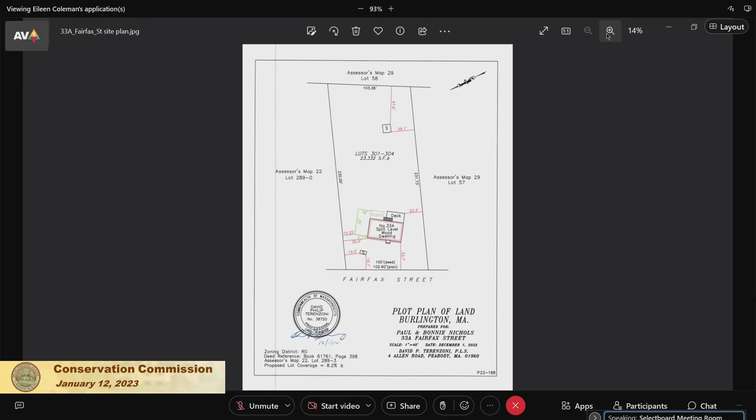Sure, yeah, so Paul Nichols, resident of Burlington at 33A Fairfax Street. The proposed project is a 16-foot by 32-foot family room addition on the left side of the house, if you're facing the house from the street. It is set back about a foot from the front edge of the house and extends 32 feet. So the 16 feet runs parallel to the street, and then the 32 feet goes back perpendicular to the street.

Where the proposed addition ends is, I believe, 152 feet from the stream, which is behind the property. Correct. Okay, thank you.

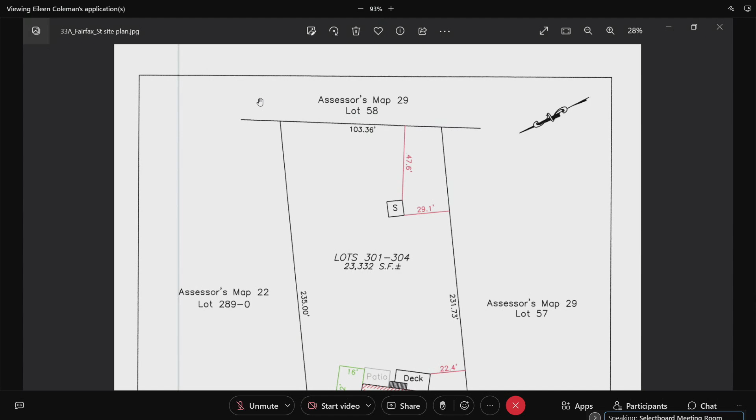Eileen or John, you got some comments for us? It's as Paul described, pretty simple. I'm sharing the site plan here. It's a fairly small addition he's proposing to put out to the side, but because there's a stream on the regulatory streams map along the back of the property, the stream is about 162 feet from the existing house. The addition will be about 10 feet closer than the existing house, up to approximately the level of the patio and deck he has there.

So this puts it into riverfront, hence the RDA. I'm not concerned about this as an issue. It's going on existing lawn only. As I recall, the property is fairly level right at the level of the house. There's a little bit of a drop, then it becomes very flat back towards the stream, and there's a fence between the backyard and the stream anyway.

Okay, let's go to the commission and see if anyone has comments. A few of us were out there for a site visit. Ed, any comments? No, nothing I can see — it's pretty clean looking what he's proposing. I definitely feel no problems. Kent? As Eileen said, it's within grass and pretty minor, so I don't have an issue.

All right, Don? I don't have any questions. Okay, again, this is one that's easy to approve. It's a good distance from the resource area, which is a regulated stream — more than 100 feet, so it's in the outer riparian zone, which is somewhat easier to approve work in.

Is anything happening to the shed at all? Is it going to stay where it is? Yeah, there were no plans to touch that — that might involve work in the inner riparian if something was done with it.

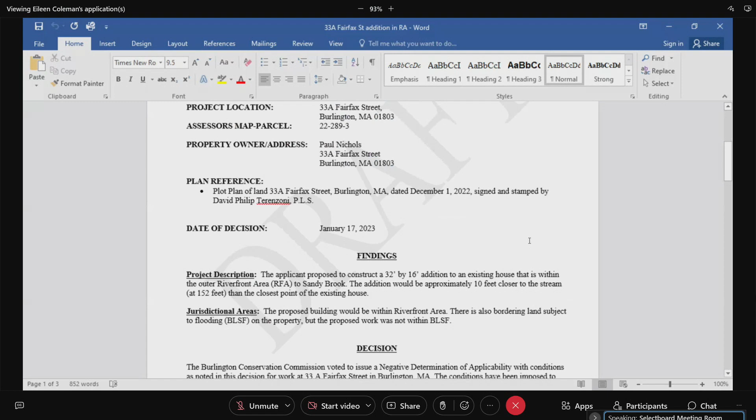So this just references your name and address, and the plan references the plot plan you provided. The applicant proposes to construct a 32 by 16 foot addition to an existing house within the outer riverfront area to Sandy Brook — sorry, I forgot to say it's Sandy Brook, not just an unnamed stream. The addition would be approximately 10 feet closer to the stream, at 152 feet, than the closest point of the existing house. The proposed building would be within the riverfront area. There's also bordering land subject to flooding on the property, but the proposed work is not within the BLSF.

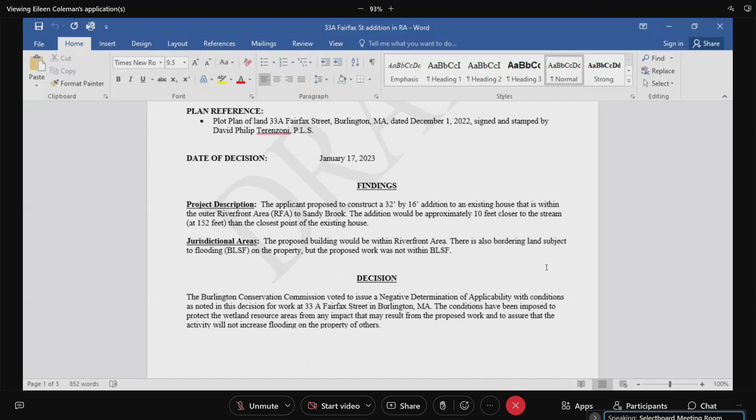Most of the decision states that this approval is only for the project as described here and tonight, followed by conditions that must be adhered to — meaning this covers only the work outlined in the project, and anything else would require coming back to us.

Before beginning, you should install sediment barriers approximately 30 feet behind the existing house — these could be staked straw wattles, filter socks, or hay bales, in a line straight across, and they'd remain in place while work is being done and until the disturbed area is revegetated. All construction or demolition materials and excavated soils shall be disposed of off-site.

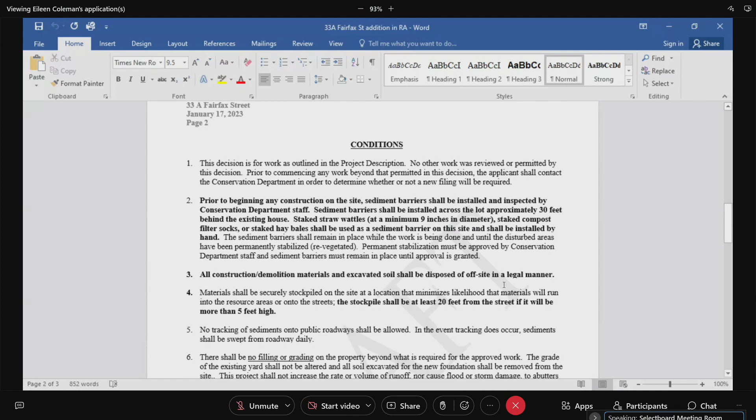Materials shall be securely stockpiled in a site that minimizes the likelihood that materials will run onto the resource areas or onto the streets, and stockpiles should be at least 20 feet from the street if more than 5 feet high. No tracking of sediment onto public roadways shall be allowed, and roadways shall be swept if concrete trucks track sediment out. No filling or grading on the property beyond what is required for the approved work, and we're not expecting any significant grading for this at all.

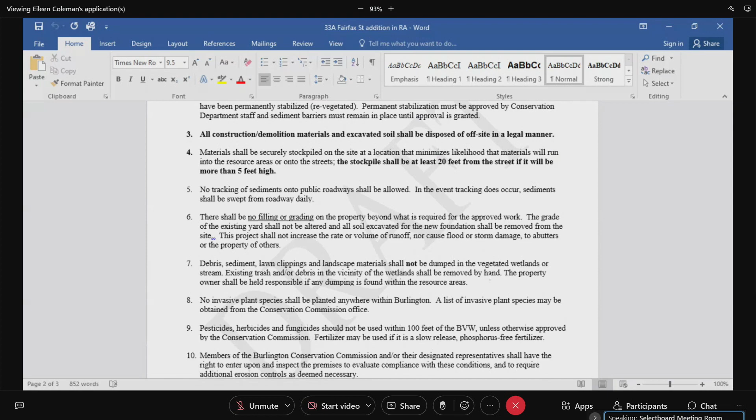That's right. Don't dump anything into the stream or the vegetated wetlands, which is way down the back end of your yard. Please don't plant any invasive species, or use pesticides, herbicides or fungicides within 100 feet of a wetland or within the riverfront area. And it's just allowing us the discretion to go on site to check that you're adhering to these conditions.

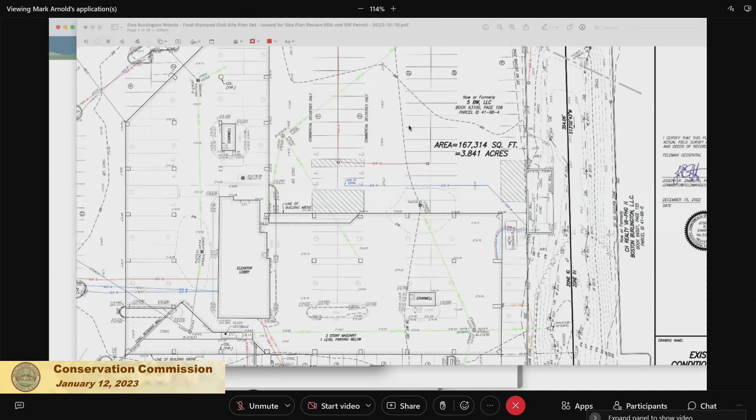Yes, yes. So this is the existing conditions plan at 5 Burlington Woods. This is Burlington Mall Road here, and this is Burlington Woods Road at the bottom of the page. The existing building is an L-shaped building here.

Most of the building is on piers, so there's actually parking underneath it. So when you see the plan here, and I'll zoom in on the building itself, you can see there's parking underneath the building because it's raised on piers, allowing for parking underneath the structure. The center core of the building does touch the actual ground, where the elevator shaft is and the lobby is. And there's a section of the building up here that is at grade at the drive.

The wetland resource area on the property is an isolated vegetated wetland. In this area right here, it has several stormwater pipes, one from the adjacent property that goes into it up here, and the site has a discharge right here into here. The site has deep sump catch basins that collect into a number of drainage pipes, and they all discharge at this point right here.

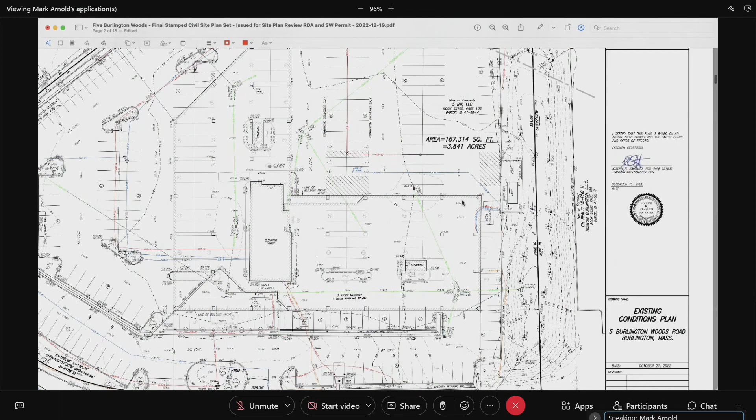There is an existing HVAC unit, concrete pad, and several large masonry walls in this area. That's the closest development area to the wetlands right now. The rest is just parking lot along the edge here, with the building in this area. Your 100-foot buffer zone is right here, this dashed line, coming in to here. So a portion of the building is in it, and a portion of the parking lot is in it.

But most of the property is outside the buffer zone itself. Those are the existing conditions on the property. So the proposed activities are—let me get to the right sheet here. So again, here's your buffer zone right here to the wetlands itself. This is your 20-foot no-disturb area.

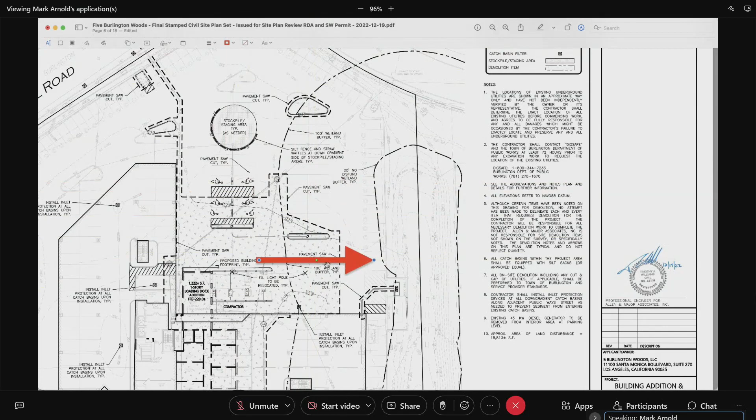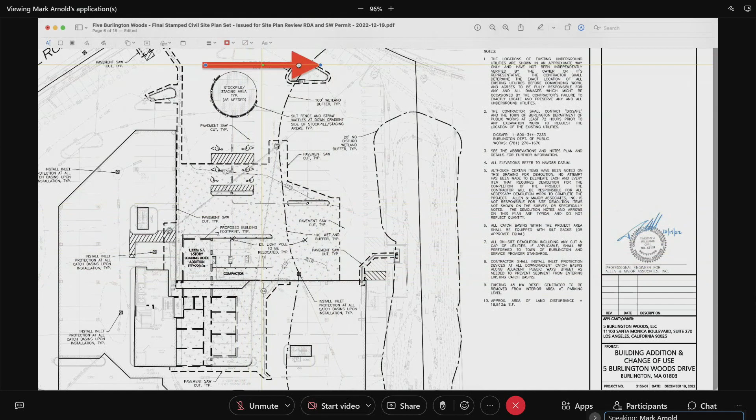So regarding impervious surface or activities in this area, we're working within an existing concrete pad area. We're just putting a wall up over a short wall—no new wall, no new footings, no new digging happening. It's just a masonry wall built on top of an existing short wall. Then you have a utility line trenched in from the building over to the generator. The rest of the work in the buffer zone is just this pavement work here, reconfiguring some landscape islands with light poles and some additional utility work over here.

The reason this utility line goes like this into the buffer zone is because this is actually a slope—you drive down this slope to get underneath the building. So to allow this utility line to be trenched up through here rather than going through this retaining wall at a really high depth and elevation, they're running it through the existing parking lot area instead. So those are the areas within the buffer zone.

Outside the buffer zone, we have a few things happening. We have a reconfiguration of some pavement here to construct a loading dock. That loading dock is just to allow the building to have additional commercial uses beyond existing conditions, to allow trucks to be able to back in here. Because it's a loading dock, there will be a lower section of pavement placed here instead of a higher point.

Because of that, they're installing a trench drain that will go through an oil water separator here, tying into the existing drain line. That's basically just to provide treatment and extra treatment for that area, since it's going to be an area where trucks are parked versus just cars. So the goal is to provide a high level of treatment before it goes in there.

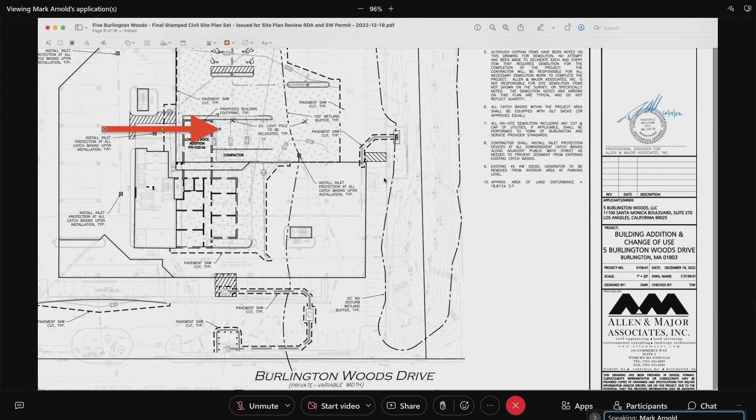Again, there's a decrease in net impervious surfaces in the buffer zone because they're reconfiguring the landscape islands, actually making them bigger and replanting them with shrubs. There's another additional area up here—we're doing some additional sidewalk here. This is part of the planning board request. There's no good sidewalk access from Burlington Mall Road over to Burlington Woods Drive.

So we're adding some sidewalk in here and a crosswalk with a sidewalk there. That creates uniformity for walking from Burlington Mall Road all the way over to Burlington Woods Drive, which is going to be a really good, significant benefit to the public and provide really good pedestrian safety. That's the project in a nutshell.

The stockpiling is going to be outside the buffer zone. We have erosion controls shown—all catch basins will have silt sacks to prevent discharge. But regarding real earthwork, there's really no raising of grades. There's going to be some excavation and removal of soil, and that's about it. So we don't have really new grade areas or slopes, or areas that are really going to be seeded. Most of the work is trenching in existing asphalt, and then it will be repaved.

That's my presentation. If there's any other questions, I'd be glad to take them.

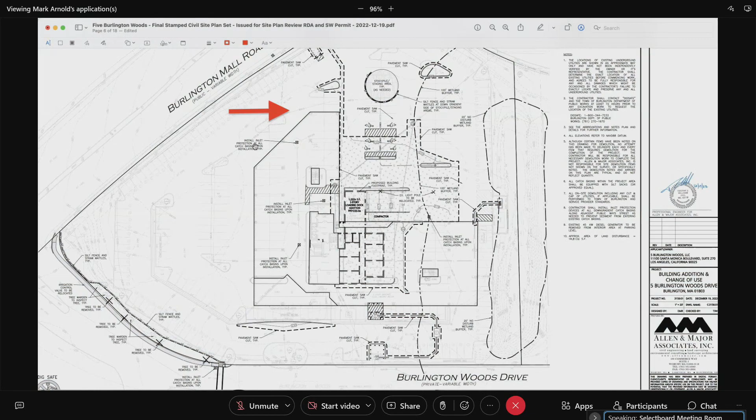So I have a couple of questions probably related more to the stormwater bylaw. Can you tell me, the isolated wetland appears to be a man-made wetland. Is there an outlet for that, or does all the stormwater for this entire site go to that wetland? And is that the end point, or is there a discharge from that?

From an existing condition standpoint, I'll bring you back to the existing conditions sheet. All the drain lines from the property do drain to this area. It's an area that definitely sees flooding. When we delineated it, it showed evidence of ponding. It was dry at the time we delineated it, but it definitely holds water. There's a pipe that comes out here that goes to Burlington Woods Drive. I'm not exactly sure where that goes.

From our understanding, there was a previous filing with the adjacent property stating this was isolated. So we went out and delineated it. We had flags very similar to what they flagged, which went all the way up into this grass swale here, connecting to the pipe here. So from our understanding of the review, it's an isolated vegetated wetland, and all the stormwater does go just to this wetland here and eventually recharges.

Okay, so the reason I'm asking is if there's no outlet to that wetland, I'd probably be less concerned about the water quality structures up gradient, since if it doesn't discharge to our municipal storm system or to any wetlands, if that's the end point of all the stormwater.

If not, if there is an outlet and it connects to the MS4 on Burlington Woods Drive, then as part of the stormwater review we'll probably want some sort of inspection of the existing catch basins to see what the sump depths are and what their condition is. Do you know if they're planning on reconstructing the parking lot at all?

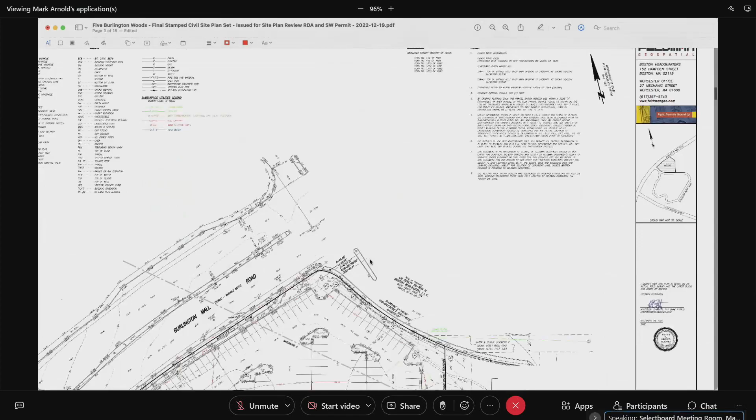So basically, yes. In areas where work is occurring, they're repaving and patching the asphalt. But I don't think the intention is to repave the entire property, just the areas where work is occurring. In regards to the stormwater, again, to the best of my knowledge, the area is isolated.

They are coming in to meet with the development coordination team and the various departments in a couple of weeks, so we can certainly ask the civil engineer. And the project is before planning board as well, so there will be some additional review from that board. Most of my concerns are related to that, and we'll have another bite of the apple on that.

I don't really have any concerns about the request for determination of applicability. Let me go to the commissioners now and see if they have any comments.

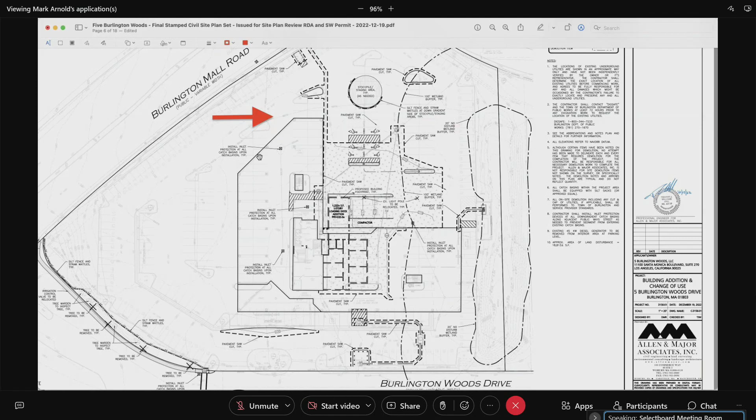Now, the outlets themselves from that upper parking lot, did you say there's one or two pipes coming out of that? There's one pipe in the upper area, so I'll bring it back to the existing conditions plan. There's one inlet up here that comes in right here. This area is actually almost a grass swale, and then right here is where you actually get some woods.

So our delineation comes all the way up through this grass swale. We actually looked at it a little carefully just because we weren't sure if the swale was hydrologically part of it, but with the pipe coming in here, we delineated the whole swale that drains down to the lower part of the wetland, which is down here.

Okay, that's all I got. Don, any comments? No, I don't have anything. Kent? John covered the one question I had. Robin? No questions.

Okay, I'm finding it kind of hard to follow the drainage of the whole parking lot. How many catch basins are there on this lot?

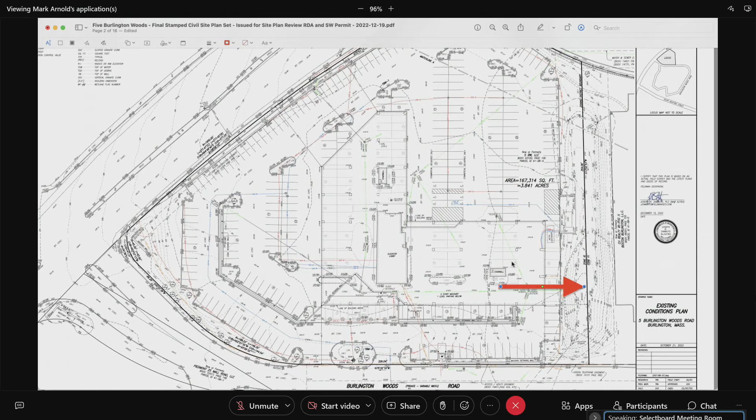So there's a catch basin here. Yep, there's a catch basin here. There's a catch basin here that drains to this manhole right here. You've got a catch basin here, which drains to this catch basin here, which goes to this catch basin here, which goes to this drain line here. And all these connect and go right down here to one outlet.

So you have a system basically draining here to here. This side of the site goes to here, and then this end here goes to there. Okay, and what is that last junction point? Is that a catch basin also, or just a manhole before it? It's a drain manhole, not a catch basin.

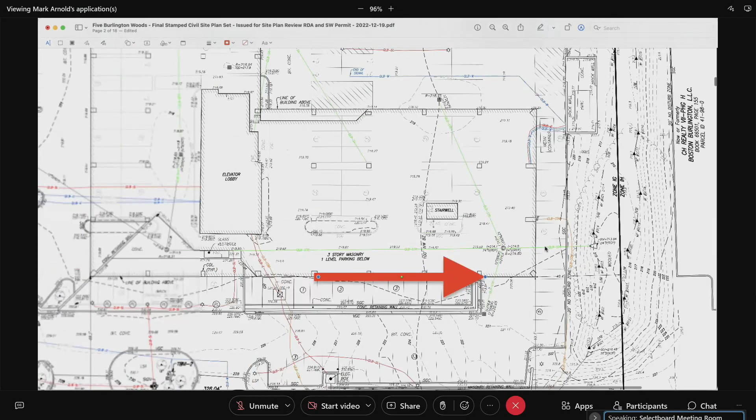All right, so if we did end up with concerns about water quality, that could be a location to put in a water quality unit if everything ties in through there. So we'll have to wait on that decision, depending upon what the rest of the hearings decide.

Questions I had were answered. I'm noticing what's marked as the resource area - half of it is mowed and half of it is not. If we're gonna call it a resource area, should we prohibit mowing in any of it? Or does that make a difference?

Is it important? Well, from a question of use, this area was probably an old wetland that was regraded into a stormwater basin. So it is functioning like a stormwater basin. This area basically has a grass slope here from this parking lot, which is the hotel, comes down and you have a grass slope up here. So it's kind of part of the landscape network in this area.

And it looks like there's a pretty well-defined edge right here where you end up with large shrubs and trees. So it definitely looks like they haven't been encroaching in there. There hasn't been any landscape dumping or anything in that area either. So I think from a standpoint of maintaining existing conditions, the applicant would like to just maintain that because it blends in with the rest of the property.

I don't think it really impacts the function. This area of the wetland is a lot higher - it's really a drainage swale basically, but it is kind of part of the wetland in regards to functionality. You can see the topo starts right here, it drops down a foot, and then down in here it drops down another foot. So you're a lot higher up here than down here. I don't think there's a lot of ponding that happens in this area at all. It receives some water, may flood very short in large storms, and then drains to the lower spot.

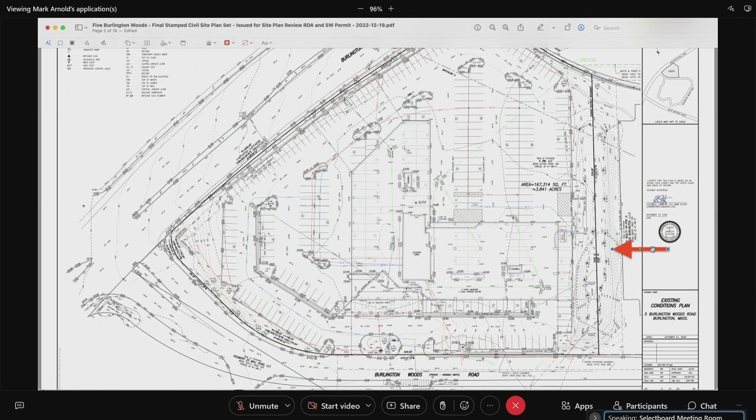Okay, I think that's all I have for questions. Do you feel we can close this application tonight? Sure. Okay, then let's go over the document.

Okay. So there's a lot of plan references to the findings. Did you hit share? Oh, sorry, you're waiting for me to share. Yeah, I'm just going to read it. Oh, I'm sorry, I can't multitask, sorry.

So the project description includes a lot of the site work that's not actually within the buffer zone. So really the work in the buffer zone is the landscape islands and the work around the generator and the wall near the generator. Work is in the 100-foot buffer zone to vegetated wetlands under the Burlington bylaw, so it's not a state-regulated wetland. Closest work is about 10 feet from the wetland.

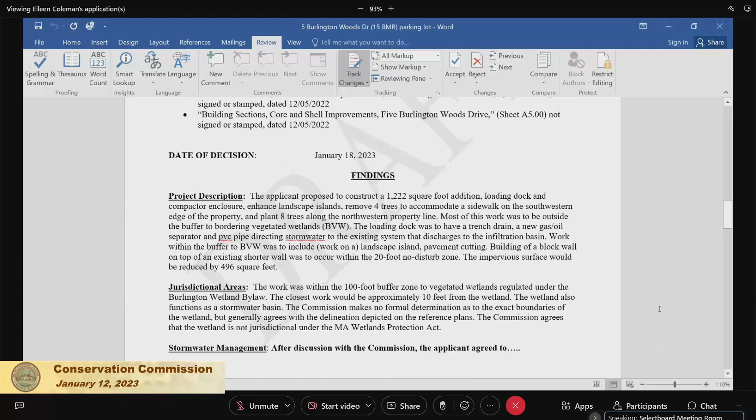The commission's not actually agreeing to the formal boundaries because of the time of year where we didn't go out and check soils, but we generally agree that the delineation looks good.

We never finished the stormwater management section on this. We should just delete that because we'll do that under a stormwater bylaw. So we can just skip that section, wondering whether our discussion would lead to something.

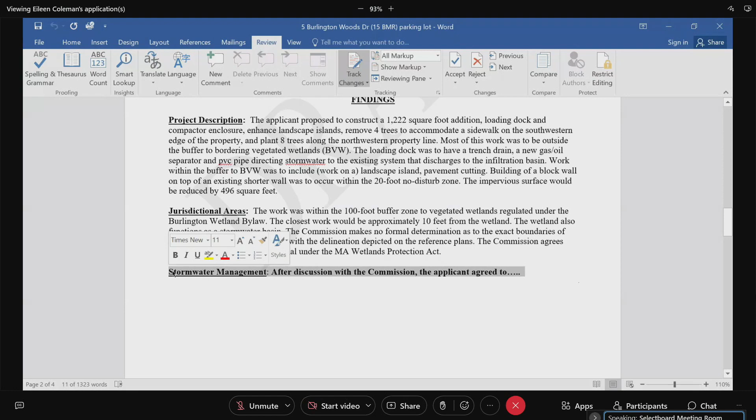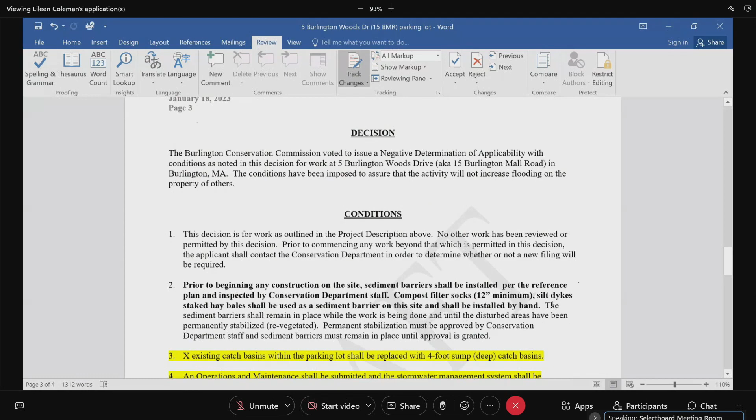Condition 1 is for the project as described, no other work is approved. Condition 2 is regarding the installation of erosion controls prior to construction, a standard condition. Conditions 3 and 4, we'll just delete the first 3 and 4. Yeah, and then there's another 4 after it, we won't delete the second 4.

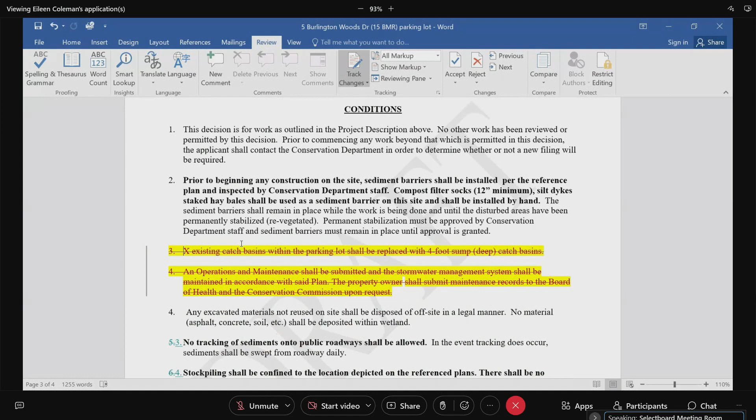Excavated materials should be disposed of in a legal manner, no tracking of sediments, stockpiling as shown on the reference plans, no filling or grading under this decision, no dewatering unless we've reviewed and approved the dewatering plan in advance. Number 9 is a standard condition about the commission's right of access to do inspections, and condition 10 is about what happens if there's non-compliance.

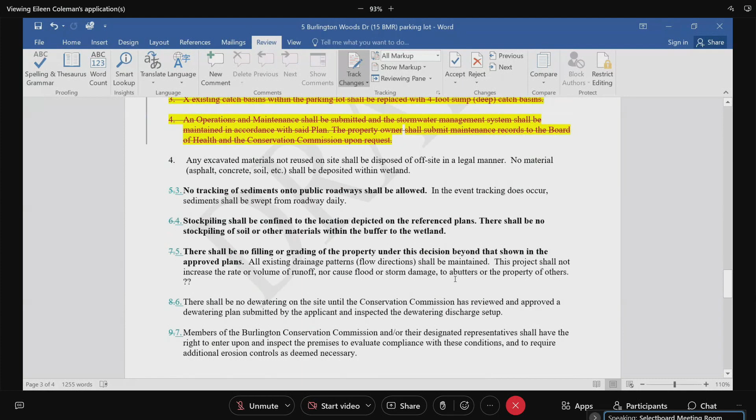Do we want to add something, as Bill said, about hand removal of debris in the area? Sure, yes, a condition of trash removal in the area, yep.

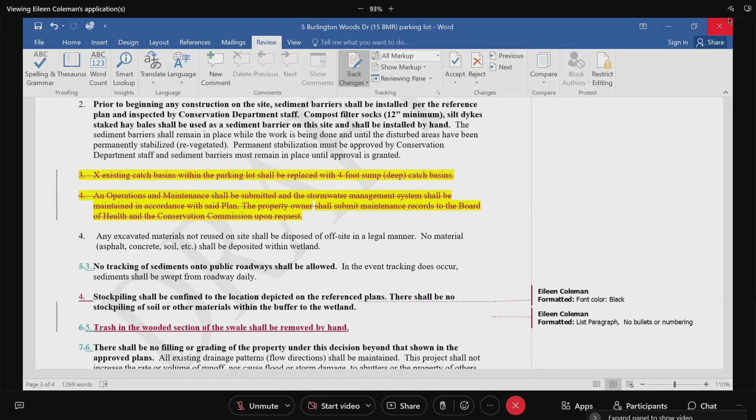Okay, very good. So in that case, do you have any other questions regarding the document, sir? No, thank you so much.

Then let's go to a vote. I need a motion to approve, to issue a negative determination of applicability for 5 Burlington Woods Drive. So moved, Don. Second. All right, let's go to the vote. Ed, how do you vote? Yes. Don? Yes. Kent? Yes. Rob? Yes. And the chair votes yes, so by a vote of 5-0-0, the motion is approved.

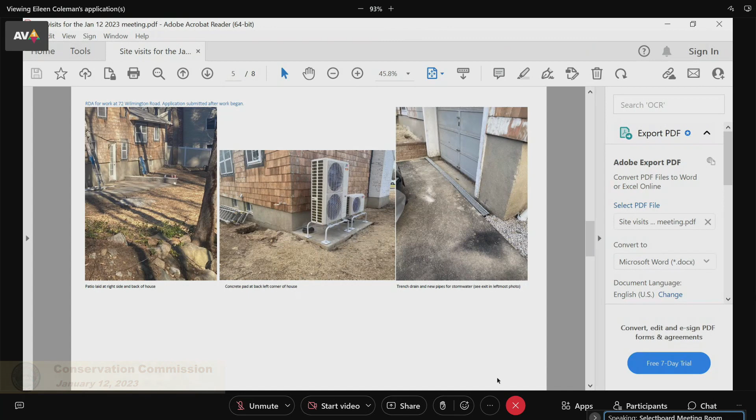So as Mr. Rumley described, he has not touched the footprint of the house. The house is as is. It is very close to a stream. It's actually part of the Ipswich River.

I think somebody noticed that landscaping was occurring, and we tried to make contact with Mr. Rumley, who came in and visited us and explained that, as he said, he was going to be redoing some walkways that were already there, and he wouldn't do any other work. We've had a little bit of trouble just with communication, trying to get an RDA in.

So we have been out to the site. I was really only on the site properly with everybody else a few days ago, but I have taken a lot of pictures from off the site. So as he said, back over here, some of my pictures are old and some of them are newer.

This is where he had, I guess, replaced a pathway that went around the side of the house. It was done with pavement, so it looks like a patio there. I think the little wall might be new, but I'm not really sure about that. And then he's put this little concrete pad for the heating element or whatever that is at the side of the house.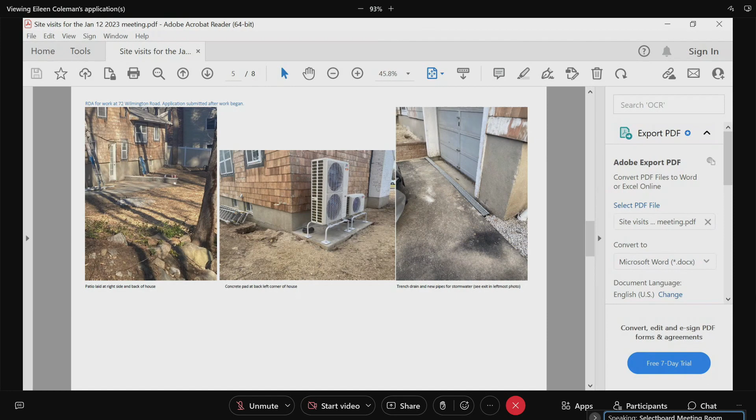He was explaining to me, but maybe he can explain a little better, about how this trench drain works. There were some pipes going down the side of the house that were pretty rusted, and he replaced those with PVC. There's a pipe that exits over here on the far left, I have a little trouble with left and right.

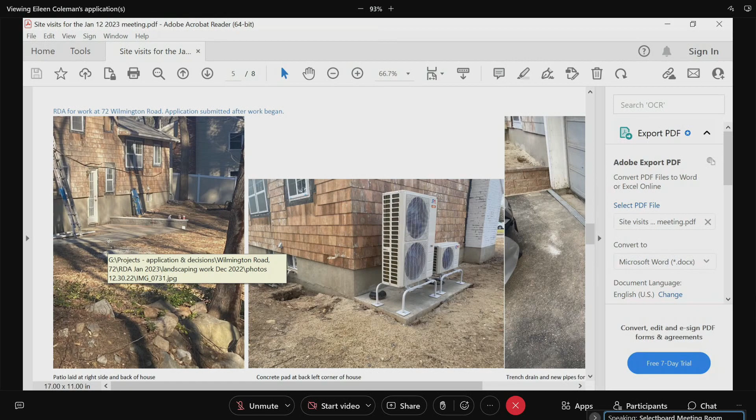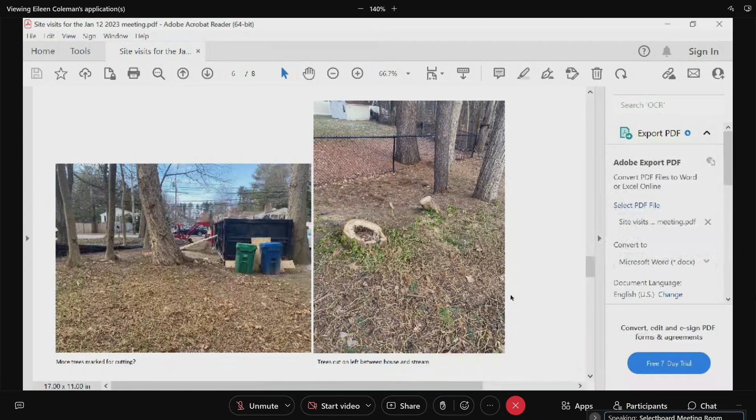But apart from that, his landscaping cleanup seems to have been a bit severe. There are definitely some places where it looks like trees were taken down. Now, this one was definitely damaged, but there are other places where trees or branches have been taken off. Pruning is fine in the riverfront, but he's taken down a lot of bushes like rhododendron.

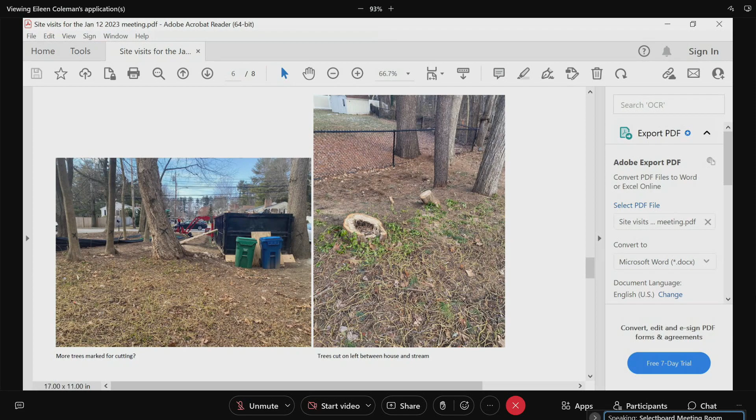And I do have a question, these trees here towards the front are marked. The left-hand photograph, there are trees marked towards the front of the house. Were you proposing to take those down? I got a price from Easton Tree Removal, and it wasn't close to being in my budget. Just as well, it wasn't even close to my budget.

So he put this, I think this is a temporary bridge, just in order to access over and back. As he explained, he did take some planks and various rubbish out of the stream, so that's good. But my concern is the fact that his cleanup was pretty severe.

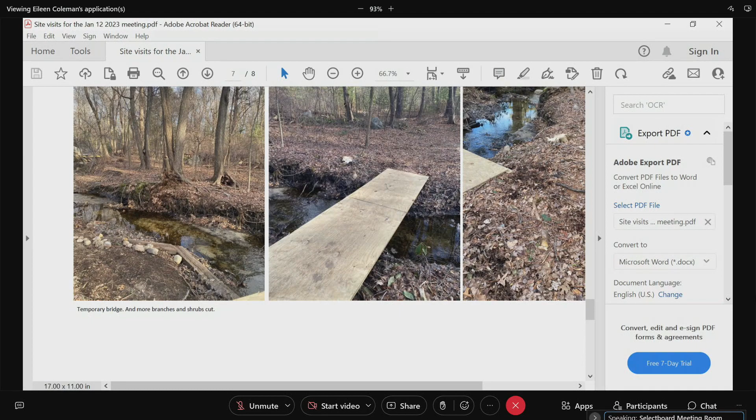He definitely took down quite a few bushes. This is the other side of the stream. It looks like they've dumped a lot of branches and the rhododendron shrubs back in there, and there's a lot of wood chips from their pruning work. There's definitely quite a lot of saplings and smaller trees that seem to have been taken down with their pruning.

The one on the left, that picture, when was that picture taken? Yesterday? This one? Yeah. Okay.

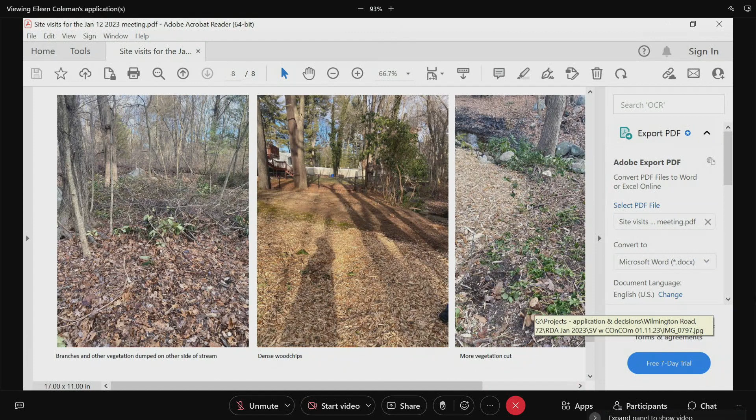That'll be cleaned up. I thought we wood chipped all of that when we had that chipper there. We pulled everything out of the back. That'll be thrown away in the dumpster.

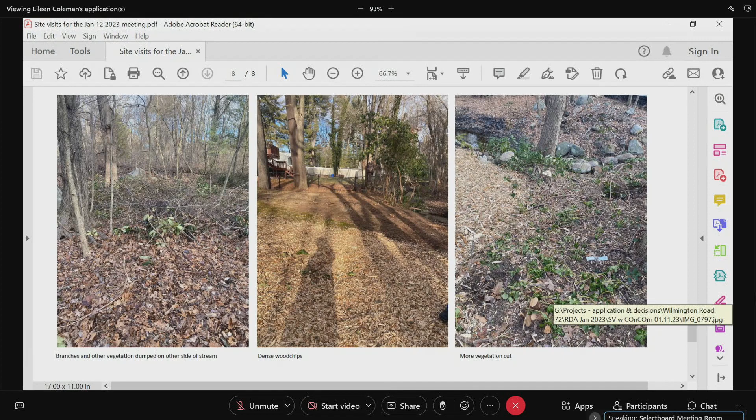I guess, is that river within the property lines? So it's on your property itself? Yes, it is. Oh, okay. I mean, looking at the river, it looks like it might be of interest, it looks like there might be a little bit of erosion possibly from the water, towards the slope of the bank seems to be a little bit curved, so I don't know if it's

I didn't visit the site, but if the stream is constantly flowing, it might be of interest to have some vegetation in the area to help stabilize the bank. Exactly, yes, very good point.

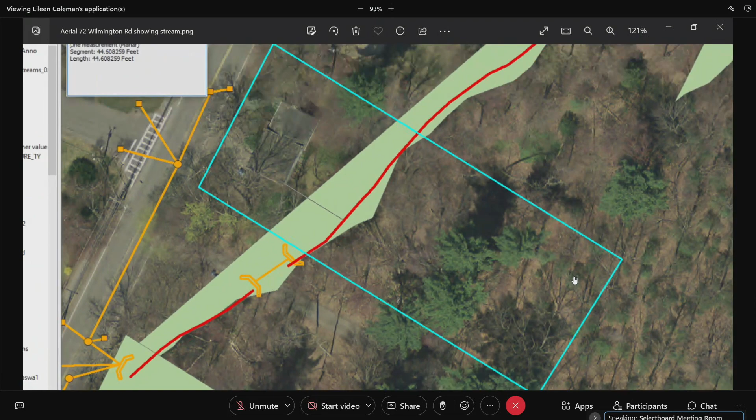So the previous owners, a long time ago, had actually armored the bank with timbers, and Mr. Rumley actually removed some of those timbers. They were all rotting and falling into the stream. So the stability of the bank, it's probably going to take a while to restabilize because of that stuff he pulled out of there. But it was a good thing that he did.

Yeah, okay. Bill, sorry to interrupt, I know it wasn't super clear to Rob that this stream is actually only 44 feet behind the existing house. So it's really pretty close.

Yeah, or at least it could also be of interest for the foundation integrity, or water into the unit too, if that's a concern. Yeah, whatever you guys suggest, I'll plant it there. I'm 100% for that. Yeah, I think we would want some planting along the bank. Yes, on both sides, if that's possible.

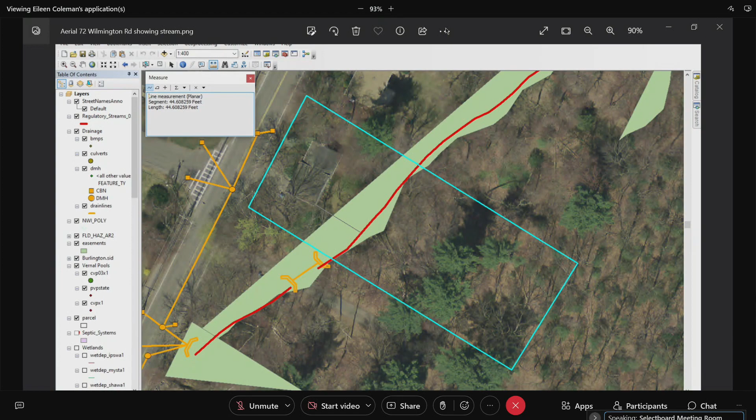Kent? Just based on your comments, Eileen, are you proposing some type of replanting in that area? And to John's point, if there was prior some type of stability that's eroded, is there something you would want done?

Well, as we explained earlier, partly for Rob's benefit, everything within 200 feet of certain streams in town is a protected area. It's a resource area that serves a lot of functions, so yes, I think it's important to stabilize and keep such areas well vegetated. I would think it prudent to replant several feet, certainly on the house side of the property, to improve the habitat, improve the stability, and provide some new native cover.

So yes, is there something you guys would propose, like native trees and shrubs, a certain number that you would want to put in the plan? That's maybe to be discussed.

Okay, Don? I concur. I think the area needs to be stabilized and mitigated with replanting.

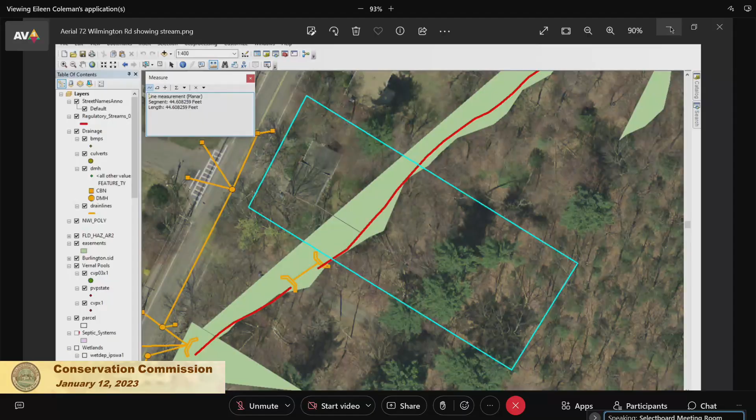All right, Ed? This is there for me also, but I would bring to your attention that along the banks of the river, there's a lot of roots actually coming right out of the banks, going nowhere. That's a loss to whatever trees those roots belong to. So now you've got to create something that's gonna stabilize that area based on what you're hearing. I saw plenty of roots sticking out the side of the banks caused by erosion and other methods.

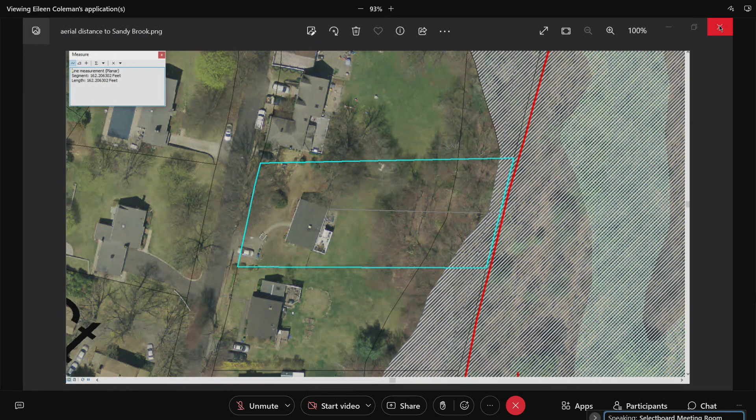The bridge itself that you have there, when does that temporary responsibility go away? I put that up the first weekend I purchased the house so I could get back there, because I didn't want to walk on the neighbor's property to clean up the debris. It's screwed down, two 4x12s. It can come up at any time and be hauled away. I did it myself, I can pull it up and out within minutes.

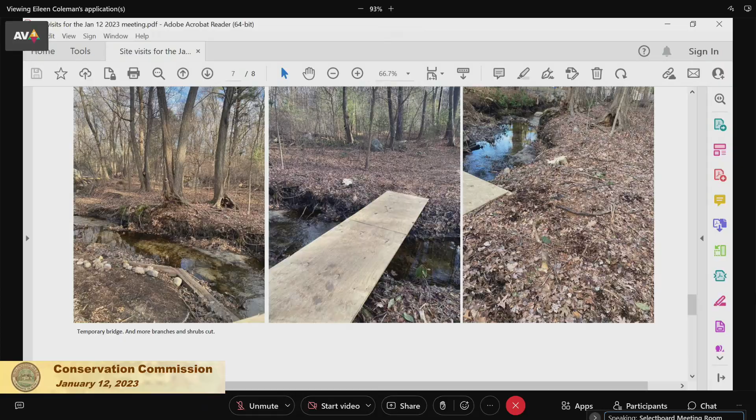Looking at the need as to why it's still there, if you needed any particular reason? Well, as of today, I'm gonna need it to get back there to get some more of that debris out, after this meeting, tomorrow, or whatnot. Or even access to the far bank for planting? Yeah, once that's done, you do intend to take it out? Absolutely, it's just temporary.

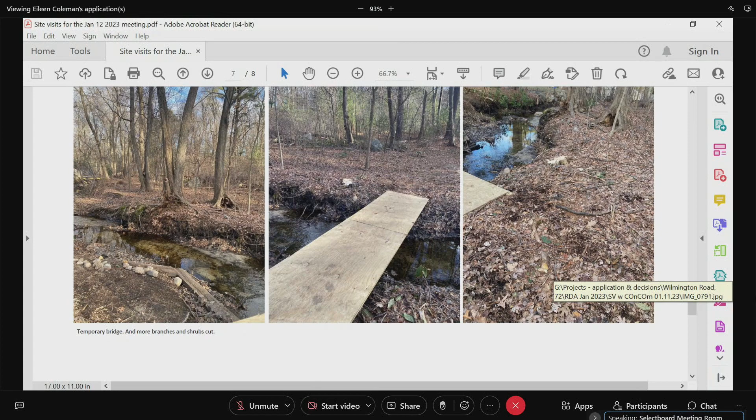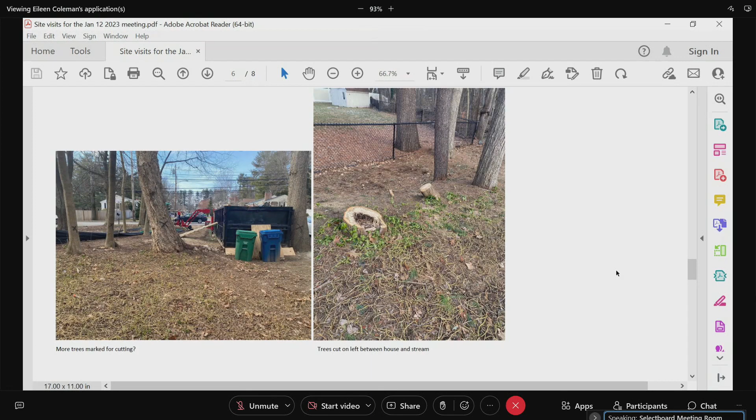Okay, I think all of my questions were answered by the group here. Seems like there was a lot of cutting of stuff, obviously just been cleared. And as was pointed out, rivers are protected, especially regulated streams. This is a particularly sensitive resource area because it's part of the Ipswich River, which has extra protection in Massachusetts regulations specifically. So regardless of its size, or even if it's not always running, if it's named as part of the Ipswich River, it gets protection as a regulated stream. The river banks are part of that system that must be protected.

This is so close to the house, we obviously can't say you gotta leave 100 feet, you don't have 100 feet by any means. So we need to define an area along the edge of the bank that should be planted and left natural. I would suggest something like 10 foot. Does that sound reasonable? We can't really even do 20 foot no-disturb here, so close to the house.

What do you think, 10? Yeah. So if we could get that planted, would you say that should be both sides of the stream? I was gonna say if you just leave the other side untouched, it'll come in. What do you think? Yeah, I agree. I think on the house side, plant some things to help restore it. Okay, you have something else to add? That's fine, I agree with that.

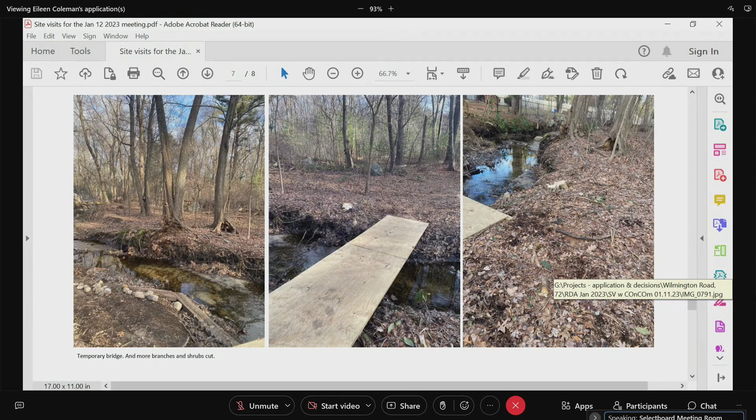But if you did want to put a more permanent bridge across there to allow access, that would be a more significant change to the resource area and would require probably a full notice of intent before us to do something like that. Doesn't mean it can't be done. And again, you can't do anything major on the other side, but if you like nature, it's a beautiful spot, it really is.

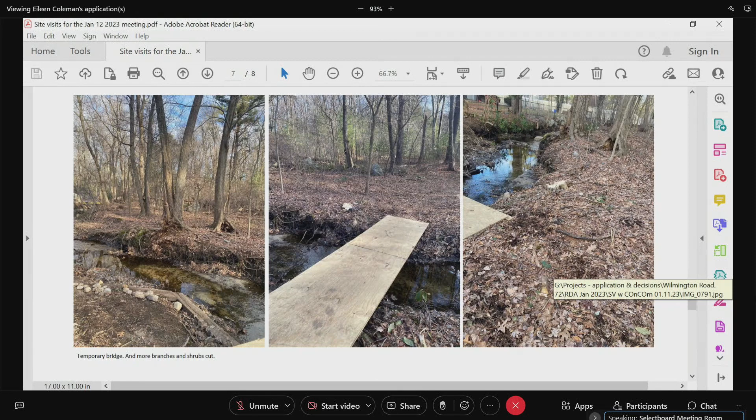So, okay, any other concerns? Do you want to go through the findings here? Sure. Do I have it ready? I sent Mr. - you got that, right? Yes, thank you. I sent him a copy earlier, so if he has questions, he will ask them after I go through it.

It starts off with his name and address, and the only plan we had was a sketch provided by applicant. He proposed to construct a patio, low retaining wall behind the existing house, trim trees and remove volunteer saplings, replace a degraded pipe conveying stormwater from the driveway and garage behind the house, replace concrete walkway in front and right side of existing building, clear debris and branches from the stream.

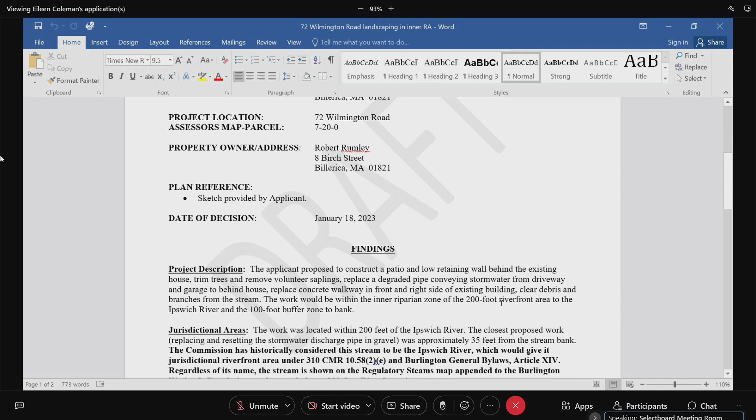The work would be within the inner riparian zone of the 200-foot riverfront area to the Ipswich River and the 100-foot buffer zone to bank. The work was located within 200 feet of Ipswich River, and the closest work, which was replacing and resetting the stormwater discharge pipe, that was sort of the physical work. I didn't really count the trimming, because that went right up to the bank. The closest structural work was approximately 35 feet from the stream bank.

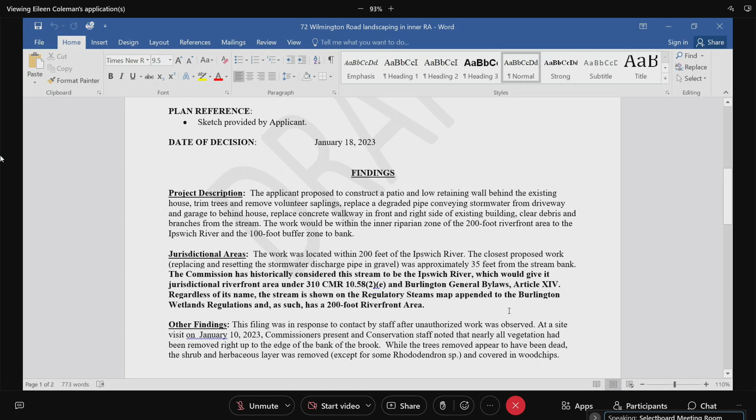This just goes on to explain how the Commission has historically considered this stream to be the Ipswich River. And even if it isn't, it's on the regulatory streams map, and as such still has a 200-foot riverfront area. This filing was in response to contact by staff after unauthorized work was observed.

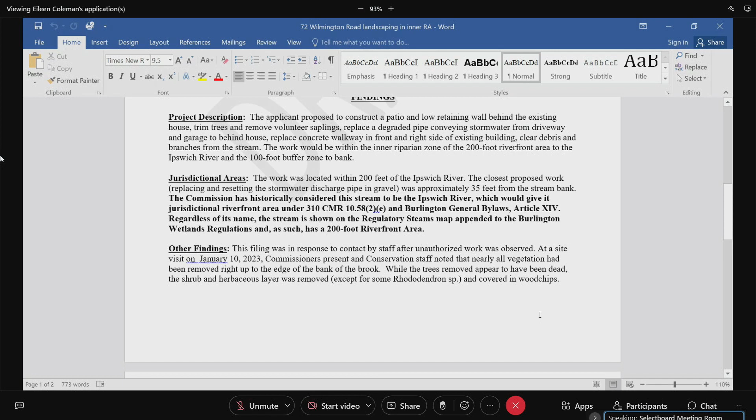At a site visit, commissioners present and conservation staff noted that a lot of vegetation had been removed right up to the edge of the bank. While the trees removed appear to have been dead, the shrub and herbaceous layer was removed except for some rhododendron species, and the area was covered in wood chips.

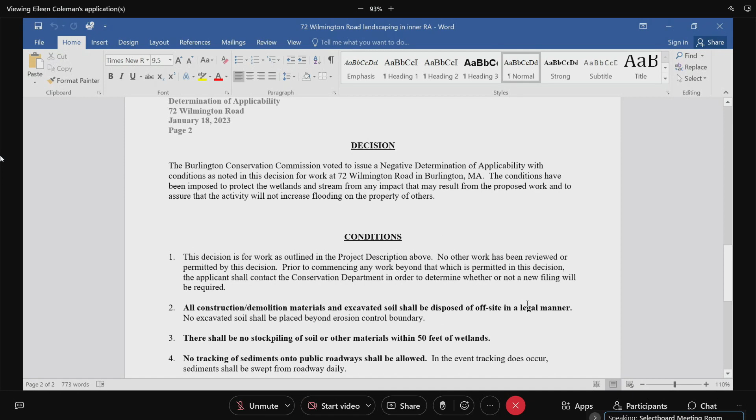Nonetheless, the Commission is voting to issue a negative determination of applicability, and the decision for work only as outlined above, as we described.

Any construction or demolition debris, the material and excavated soil should be disposed of off-site in a legal manner. No stockpiling of soil or other materials within 50 feet of wetlands or stream bank. No tracking of sediments onto public roadways shall be allowed.

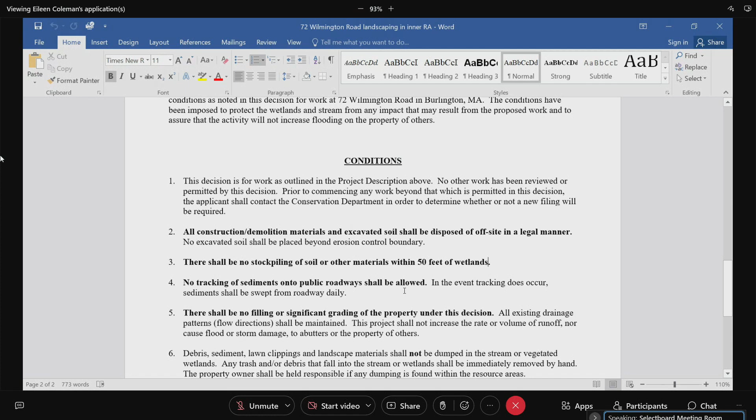These are all pretty standard, and most of the work is actually done in this case. There should be no filling or significant grading of the property under this decision. I don't think any grading did occur.

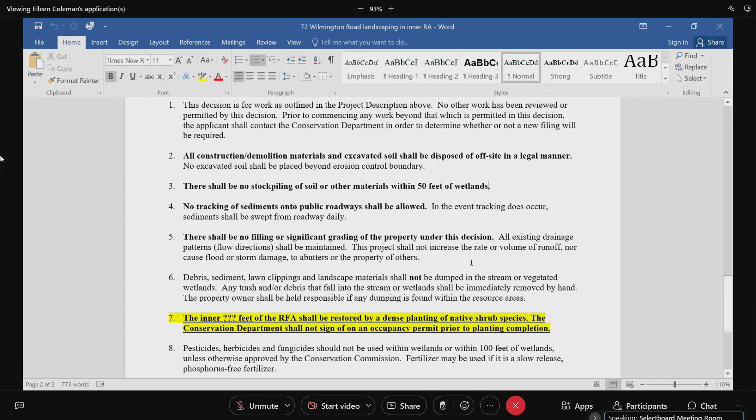Trash and sediment shall not be dumped in the stream or vegetated wetlands. So I think he's also going to remove - if you wish, I can put that in as a clarification - at some point after this meeting he will also remove the bridge. Well, I didn't mean the bridge. That's a good point - bridge and debris behind, the branches and stuff, yeah, to be removed, make it look a little nicer. He still has the option of putting a permanent bridge in if he wants. Well, he'd have to reapply - if he does so, he will have to come back again.

Yeah, and then so we had a discussion here about the inner - whatever feet. We had proposed something, and I think we agreed that the inner 10 feet of the riverfront shall be restored by a dense planting of native shrub species.

Oh, I think maybe we just need to clarify. Oh no, that is clear. Inner implies the side only - the side towards the house, right? Yes, sorry, just say the side towards the house. Right, is it inner - actually we both use inner, is it both sides? The riparian - it is both sides. I'm gonna write 'closer to the house' in brackets.

Shall be restored by a dense planting of native shrub species. The Conservation Department shall not sign off on an occupancy permit prior to planting completion, and Mr. Rumley shall not use pesticides, herbicides, or fungicides on this property. We have permission to go check on the work to see that the plantings have been done. I think on number 8, we need to approve the species.

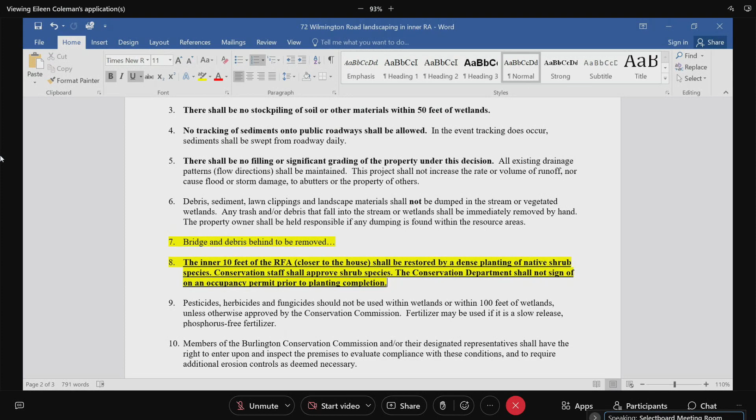I just have one curious question. The drain is in front of the garage door. Have you tested that to see if it's actually going to take the amount of water you're going to catch, or is there such a pitch in that driveway? There was a crude drain there before, and one in the garage that all went into. I have pictures of those, and it did not work. Obviously no one's lived in the house for a few years now, due to the lady passing away. So all I did was put a PVC pipe like she showed, and traced it out back. I wanted to bring it to the river, so as the grade went down I just left it into rock, and it's above ground, because I didn't know what to do at that point since I was trying to catch as much water as I could coming down the driveway. But road 62 has kind of a little hump before you get on it, so it keeps everything — I think when they did the road, it all goes to the drain, which is actually in front of my house. There's not much, the only thing it catches is what's on the driveway, at least in the last month that I've noticed.

All right, we all set? Yes, I was just going to try and look at the front of the house on... Okay, then I think we are ready to go.

A motion to issue a negative determination of applicability for the project at 72 Wilmington Road. Anyone have a motion to do that? So moved. Second, Kent? Okay, let's have a vote. Ed, yes. Don, yes. Kent, yes. Rob, yes. And the chair votes yes, that's 5-0.

You're approved, good luck on the project, and just keep in mind that it's kind of a privilege to live at the headwaters of the Ipswich River. You really are there, and it's a beautiful piece of property, and I hope you enjoy it and respect it. Thank you so much, and thank you guys — great area, take care.

Okay, next on our agenda is a request for a certificate of compliance or completion and release of surety for the first site of 39 Cresthaven Drive, Jimmy Chu LLC, DEP number 122680.

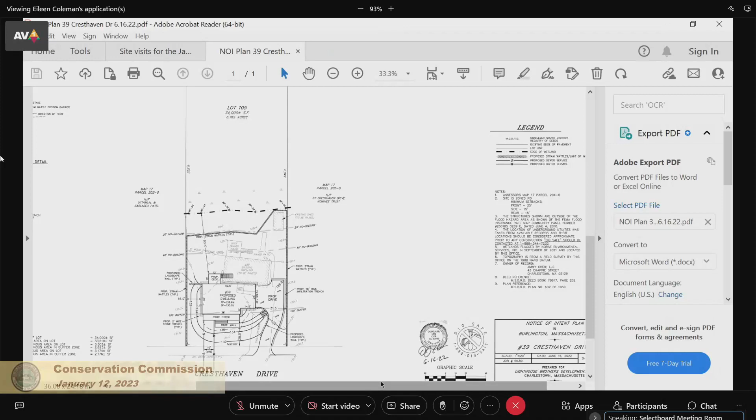All right, I have a motion to issue the certificate of compliance for 39 Cresthaven Drive. So moved, Kent. Feel free to second. There you go. Okay, Rob gets his first vote.

Okay, so let's have a vote, please. Ed? Yes. Don? Yes. Kent? Yes. Rob? Yes. And the chair votes yes. That's by a vote of 5-0-0. Certificate of compliance is approved.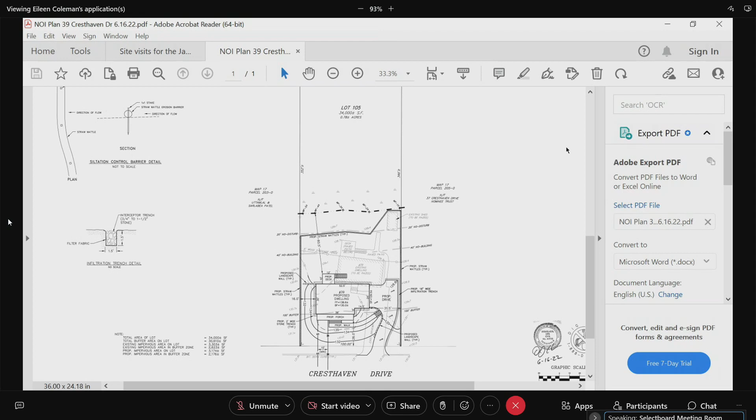Item 5B is request for certificate of compliance for 207 Cambridge Street, Federal Investment Trust, Mo Santagello, I don't know, I think I butchered that, for wetland bylaw permit. Is someone here for that?

Yes, Chair, this is Fred Russell. Can you hear me okay? Yes.

Just to give some background, 207 Cambridge Street, we had to file for a permit under the town's bylaw for some drainage improvements. There was a lot of runoff coming from the hill to the east of the site, coming down across the parking lot and causing icing problems on Cambridge Street. We had come in about a year and a half ago to provide some drainage to collect that runoff and provide infiltration on the property, and then have an overflow, which we received approval from the Commonwealth of Massachusetts MassDOT to connect to their drainage system in Cambridge Street.

That work has been completed. Although all the work under the permit we had applied for is complete, we aren't asking for a certificate of compliance, but more of a surety release, because during the planning board process, there was some work required about removing some asphalt in front of the building, which will occur within 100 feet. So our thought is to keep the permit open until that work is complete in the spring, and then we will come for certificate of compliance. But we are looking for bond surety release for the drainage improvements, which are 100% complete.

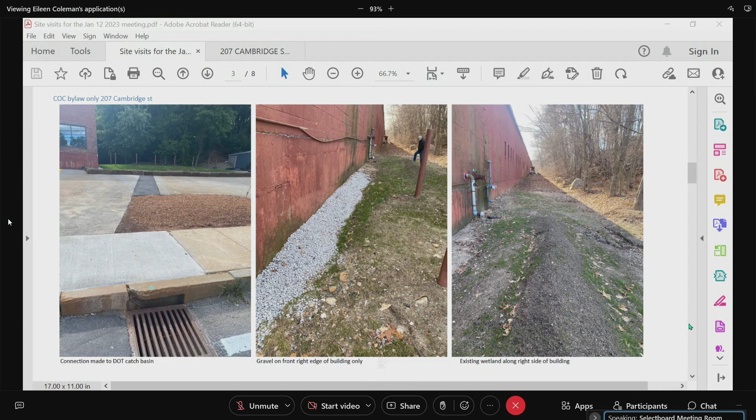This was the work done to connect to the street drainage, which seems to have been done pretty successfully. This was the wetland down the side of the building. Let me just move my own things here that are in the way. And the next pictures are of the drainage basin.

We would ask Fred to remove the erosion control that's still here, because at the moment it's not actually functioning - it's not going to allow an overflow if the erosion control is in front of it. There is quite a bit of water held in there at the moment. Just ask Fred if he's fairly happy with the way it seems to have turned out.

Yes, actually I think I'm very happy. I monitor it quite a bit. It's actually not far from where I live, and especially that rainstorm we received a couple weeks back, I was curious how it performed. It performed very well in that rainstorm, which I think we received about 2.5 inches in a short period of time. So yes, I'm fairly happy with how it's performing.

Okay, so quite a lot of it has become grassed in and it's reasonably stable, but as you can see, some of it still needs to be grassed - it's not fully stable right there. We've got some rills happening from the water coming down the slope, so that'll just have to hopefully grow in. Maybe they could even seed it a bit more in the spring. But I don't think I have an issue with them getting at least some of their bond back at this stage. The stormwater feature does seem to be built as designed.

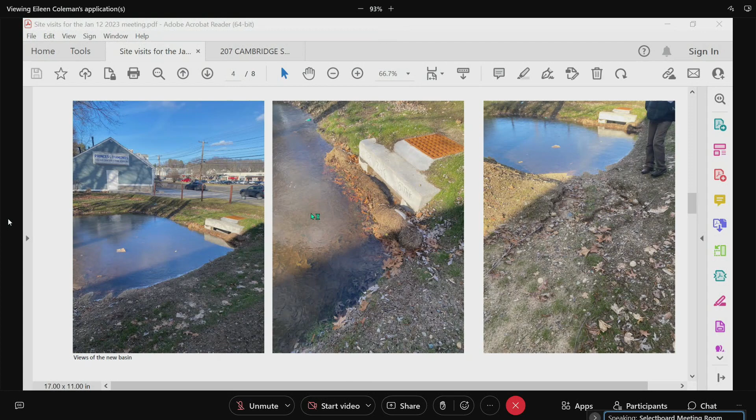So what was the bond on this? I am looking right now - 7,500. Yeah, 7,500. And what percentage do you think would be fair to return?

Do you think they should get more than 5 back? Return 5 and we hold 2,500? Yeah, that sounds like what I was thinking. I mean, they do still need to either apply a little bit of extra loam or at least make sure it's...

The slope works, I can chime in. Honestly, the work necessary to just put some loam down and seed is probably $200. I'll be very honest with you, I think $2,500 is extremely steep. I believe 500 is probably more than enough to dust off with some loam and rehydroseed. Again, you're probably looking at about $200 worth of work. So with all due respect to the staff and the commission, if we could maybe reduce the bond from 7,500 down to 500, I think that's a little more reasonable.

But we're not insuring the cost of the project, we're insuring the effectiveness of the project. But I think you may have a point that 2,500 could be reduced. What if we say we held $1,000 and gave back 6,500? We'll take a vote on that to see if everybody agrees. How about you, Fred? Does that sound reasonable?

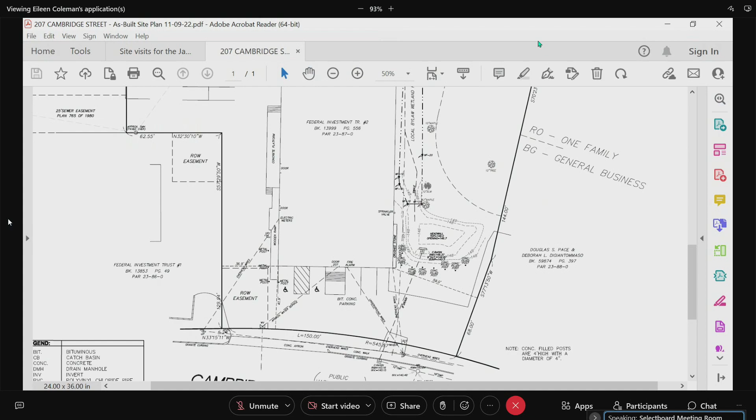Okay, so may I have, we'll be issuing the certificate? No, we'll just be returning, okay. So could I have a motion to return $6,500 of the $7,500 bond towards this certificate of compliance for 207 Cambridge Street? We will not be issuing the certificate of compliance itself. Do you have such a motion? So moved, Kent. Second? Okay.

All right, Ed, how do you vote? Yes. Don? Yes. Kent? Yes. Rob? Yes. And chairman votes yes, a vote of 5-0-0. Thank you all very much. All right, thank you, sir. Thank you.

Next item on the agenda is a discussion for a violation at 11 Marjorie Road. Is there someone here for that? There's nobody here for that. Okay, so I'll just give you a little background.

This was, we got a report of some tree cutting going on at Marjorie Road. I went out there. They were in the process of doing cutting, so I talked to the tree company, had them stop cutting. They gave me the owner's contact information. I spoke to the owner on the phone, explained to him that they were cutting in the buffer zone to wetlands, if not within wetlands, and that they needed to stop, and that I would schedule them for an upcoming conservation meeting. Unfortunately, I didn't get an email address for the person, so I do have a phone number.

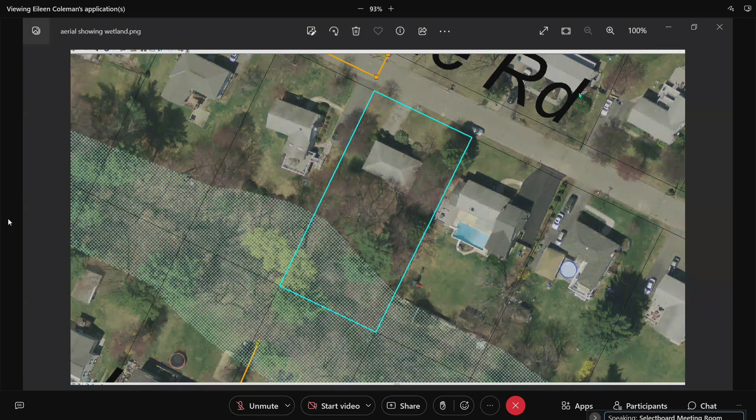Okay, and what else we have? So we need to just take a motion to continue this. We'll try to schedule a site visit. It's not really a hearing or anything. I'll just put it on the next agenda. We'll try to get a site visit planned if we can coordinate, so we can see what it entails.

Okay, very good. Next item, item number 7, a continued public hearing for a notice of intent at 214 Winn Street, Robert Bonanno, to reset a culvert, trench, and install electrical conduit, modify the driveway with a new wall, DEP number 122684. Good evening, how are you?

Good, thank you. And you? Good, thanks.

Introduce yourself for the record, please. For the record, my name is Mary Trudeau, and I'm representing Mr. Bonanno of 214 Winn Street this evening. At our last hearing, the commission charged us with answering a couple questions. One was the length of the culvert that went underneath the driveway, and Mr. Luther went out and measured it, and it is 28 feet. That's the length of the pipe we'll be resetting underneath the driveway as part of this project.

The other thing that has happened since then, and I had sent a letter to the commission, was that Mr. Bonanno has decided he doesn't want to put the decorative trim on the driveway at this point, so he's taking that off the table. That means less work involved. So the two parts of the project still in front of you will be the installation of the electrical line below ground, cutting off the telephone poles flush with the ground and taking out the top part, and the resetting of the culvert to make sure that water still flows in the stream.

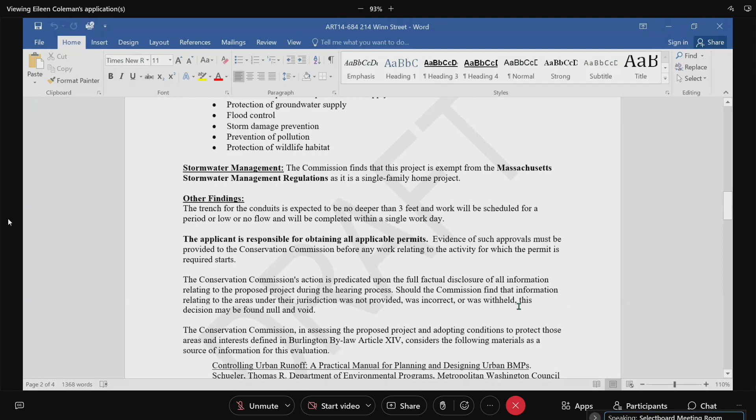So then there's a draft condition under the bylaw, which will include a $2,000 proposed bond. That's basically it for the findings in the bylaw. Then the order of conditions, once again, the same plan references, it's a fairly standard order. The order permits work within the buffer zone to bank and BBW.

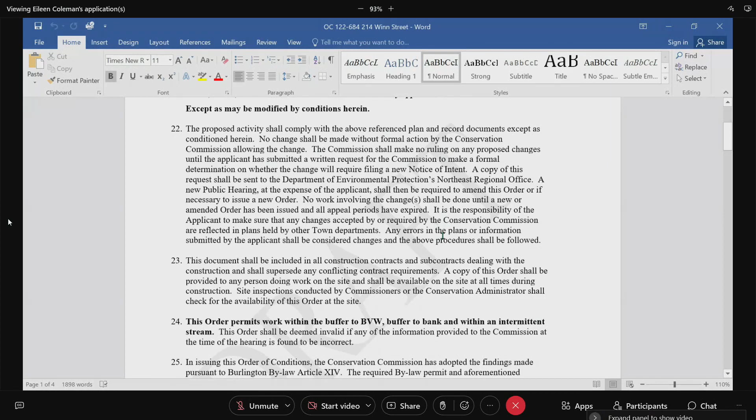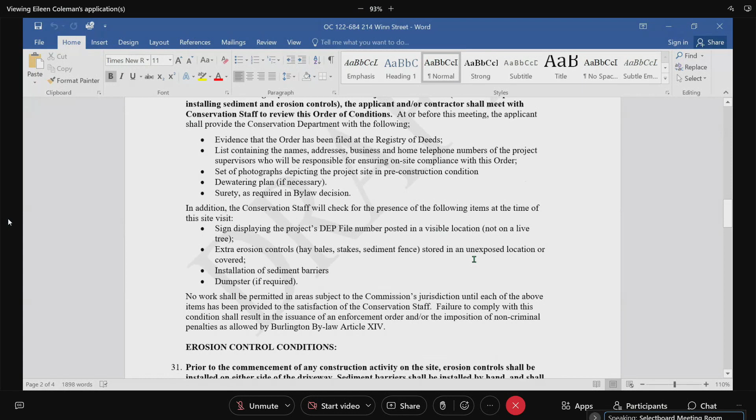Standard conditions about notification, written notification of the start of work, inspection of erosion controls—all standard. Did we send this to Mary? We did, and Mary has seen these about 50 times before. So it's all standard pollution control conditions.

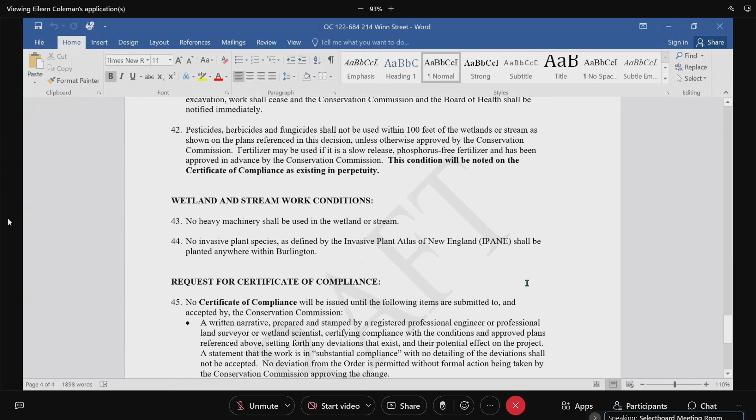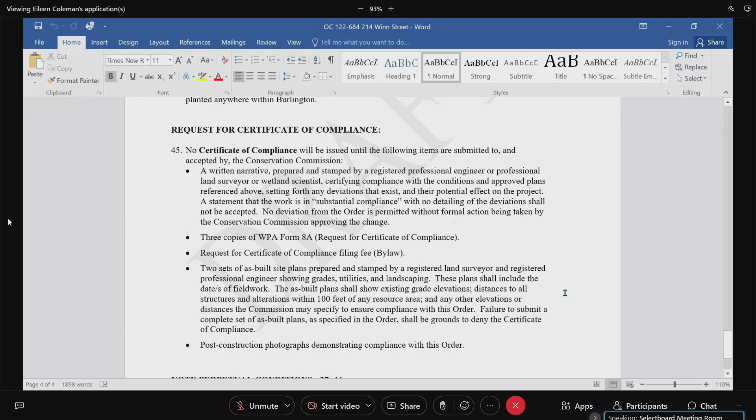Condition 43 is a prohibition on heavy equipment within the stream or the wetlands. Condition 44, prohibition on invasive plant species. Condition 45, the standard condition about how to achieve a certificate of compliance. Conditions 37 through 44 are actual perpetual conditions. That's it. The only comment I had was—

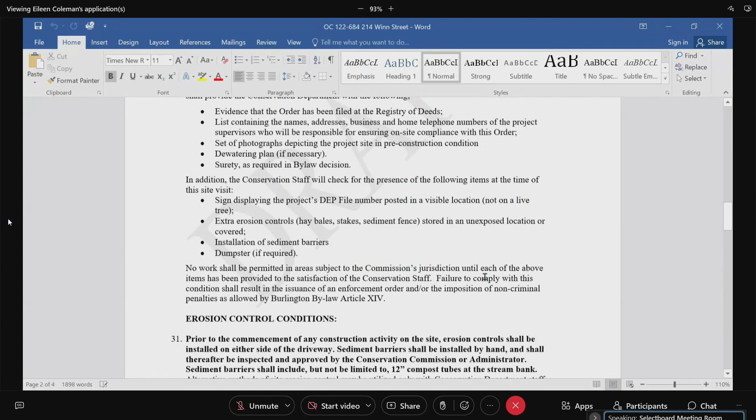The erosion control product you've specified is the 12-inch Filtrexx tube, which is a pretty hefty product for the amount of work we're doing. I could see using it at the culvert where we're replacing it, since you might have water coming in or out of that pipe. But for the length of the driveway where we're just putting in the conduit, I'd think straw wattles like the utility companies use would be okay, since they'll only be out there for a day or so. I think I drafted this, so John might have a different idea, but I only really anticipated you having the erosion controls near the stream.

What about 20 feet either side? Not the whole way down, since it's so quick—they'll be sweeping it back in the hole before. But we can say install it for 20 feet on either side of the driveway. Is that okay? Does that work for you, Bill? Yeah.

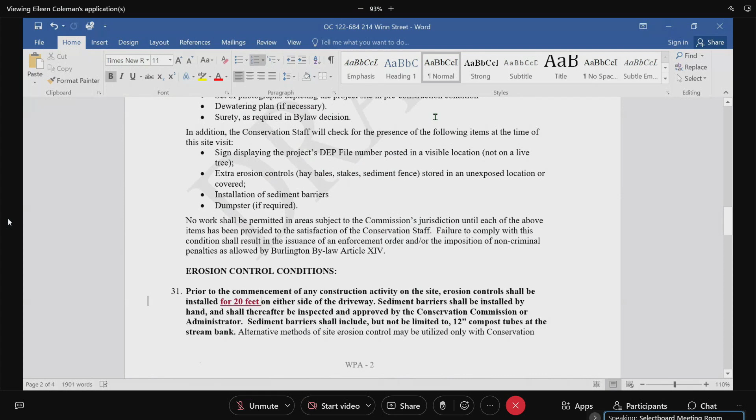Okay, so we're good on that? All right, I think we can wrap this up. Since this is a public hearing, it's a little more involved in closing it. Could I have a motion to close the hearing for the notice of intent at 214 Winn Street, DEP number 122684?

Move. Second, Don. Okay, a vote. Ed? Yes. Don? Yes. Kent? Yes. Rob can't vote on this since he wasn't here for the last one, so he understands, just wanted to close it. And the chair votes yes, so a vote of 4-0-1, the hearing is closed.

Was there a question? Could I have a motion to approve the findings under the Burlington Article 14 and the State Wetlands Protection Act for DEP number 122684? So moved, Kent. Second. Okay, vote: Ed, yes. Don, yes. Kent, yes. And the chair votes yes, so that's a vote of 4-0-1.

Could I have a motion to approve the order of conditions under Burlington Article 14 and the State Wetlands Protection Act for DEP number 122684? So moved. Second, Kent. All right, Ed, how do you vote? Yes. Don, yes. Kent, yes. And the chair votes yes, another vote of 4-0-1.